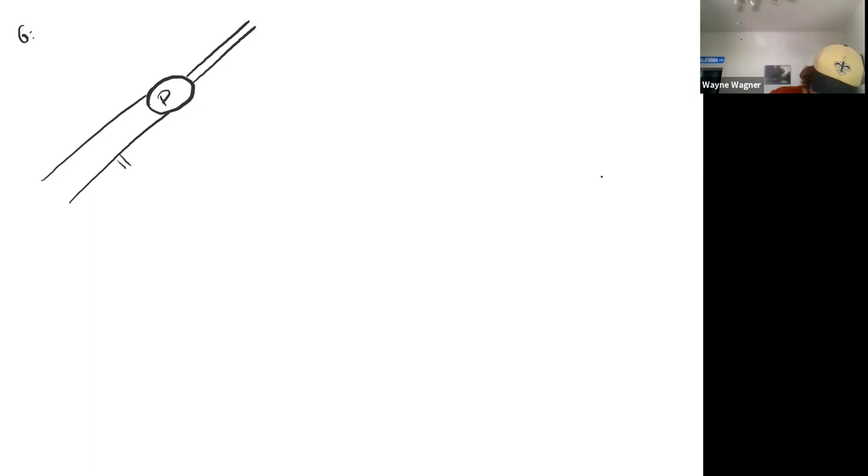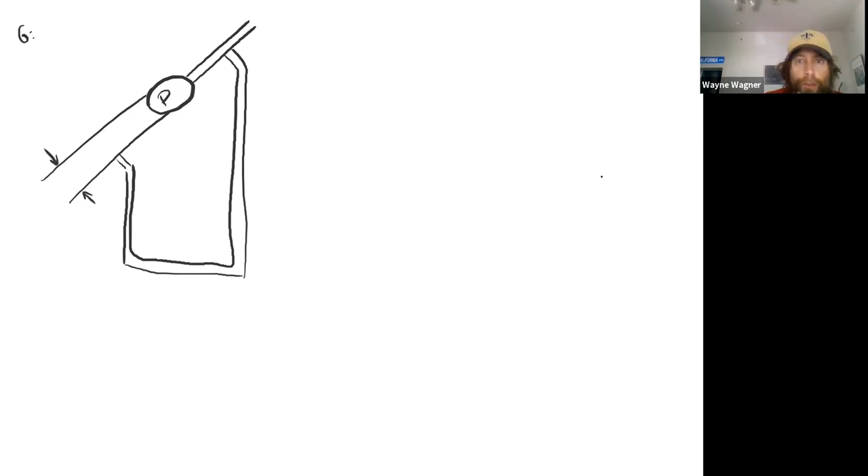Okay, so here's what we got for given. Okay, really? Okay, so I give you this thing, and it's kind of on an angle, and there's a pump. And then what comes out of the other side is narrow. I'm not drawing this exactly right because obviously there should be some holes here where the manometer comes in, but doing the best I can here. Okay, and so this is D1, which I think it gives as 2 inches, and then D2 is 1 inch.

Let's see. Oil is pumped up and through the contraction shown at a flow rate Q. There's a certain number of CFS. I don't really know what a good number is for the CFS. I think because everybody got different numbers here, people just got huge answers here. I'm going to go ahead and go with 0.1 CFS because this is a pretty small pipe.

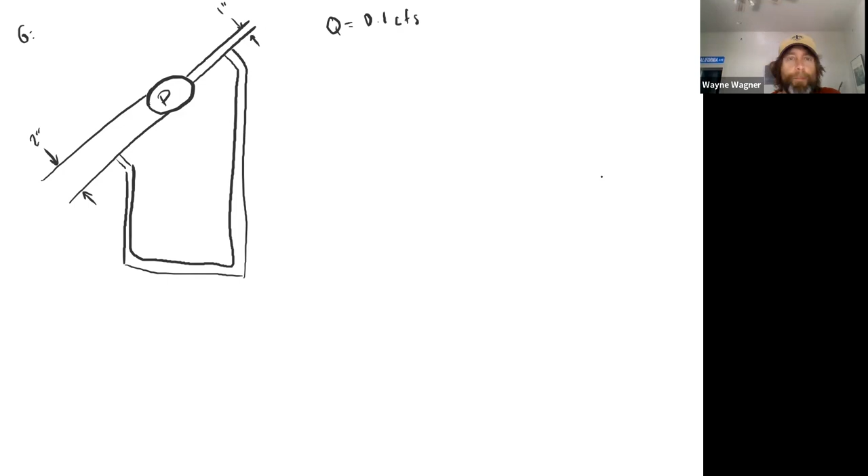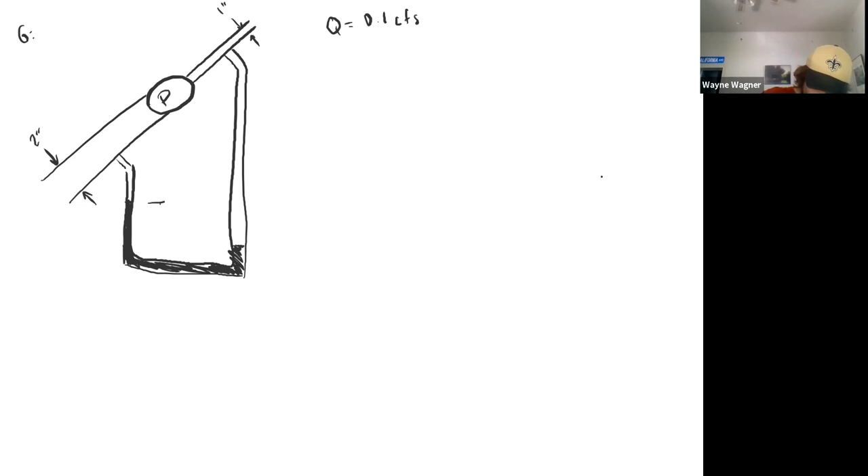Okay, so the manometer is filled with mercury. And so we've got mercury from here down to here. If you haven't figured it out, these are pretty much my favorite types of problems to ask, simply because it makes you have to know all your fluids to do these. So they give you that this is H naught equals, okay, this is mercury. So S equals 13.6 or 13.55. So this is 6 feet. That's quite a good bit of pressure considering it's mercury.

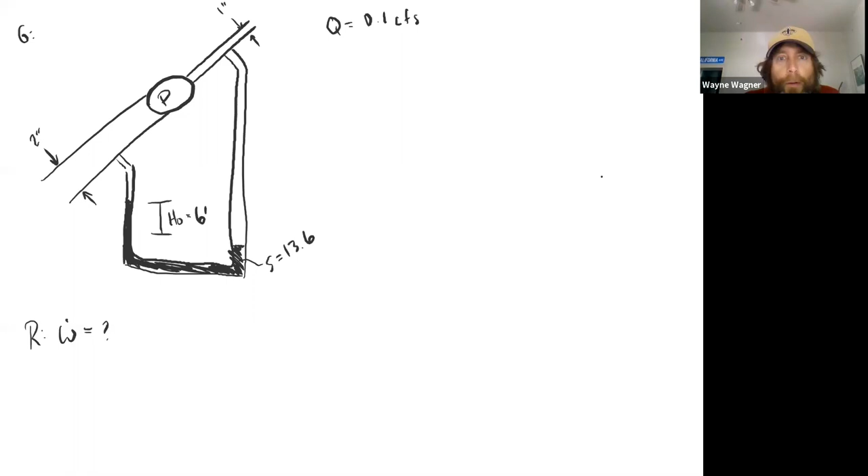How much power? Okay, so required, we want power. So the rate of work. How much power does the pump need to supply the fluid? So this is to the fluid. So this is not the amount that you need to supply to the pump. And so all of this, by the way, this is oil. So it has a specific gravity of S oil. So S oil equals 0.82.

Okay, you may assume there's no head losses. All right, so this is, as you guys know at this point, this is pretty much one of my absolute favorite problems. It did also tell you that this to this, not that this matters, it was just kind of a way to help people define variables. It kind of gave you these heights right here. So this is capital H, and this is lowercase h. Those heights are, you could call them whatever you wanted to call them. In fact, for lowercase h, I would just call it Z2 minus Z1.

But sometimes people would like to have a lowercase h because instead of having a Z, it's just a smaller term. All right, so what we're going to do here, I guess this is all part of the given. So what we're going to do is, by the way, one of the red herrings that will show up in a lot of these problems is they'll give you this angle right here. They'll be like, oh, here's this angle, it's like 30 degrees or something. But you don't care about that because all the distances you've been given or not given are vertical. So the only thing you care about is the vertical distance. The only way you would want that angle is if it only gave you a diagonal distance and you need to calculate a vertical distance.

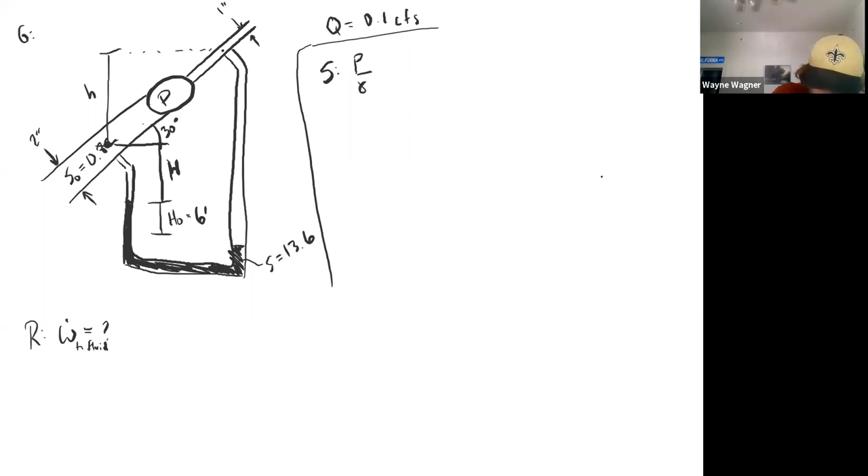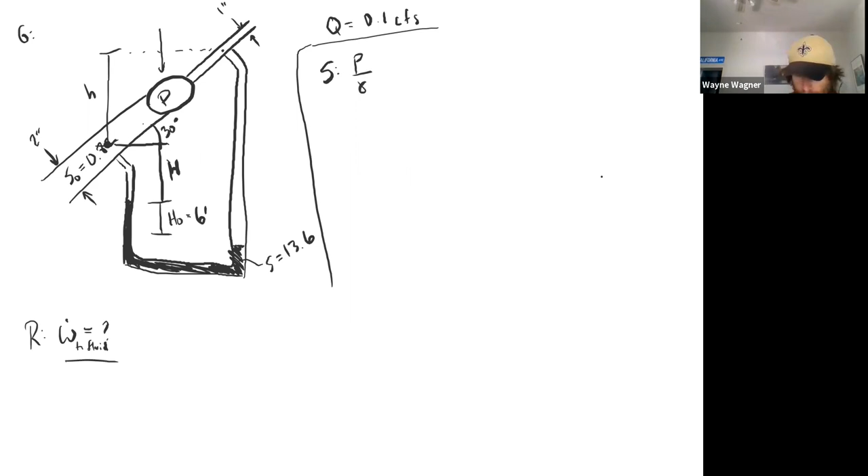Anyway, so we're going to do the energy equation, P on gamma. And this is obviously energy equation because we've got a pump here. Anytime you see a pump, and what we're looking for here is a power supplied to the fluid, we're going to be working with the energy equation. And the other way, before I write out the full energy equation, is to note that the equation we're going to end up with is the power to the pump, not the pump, to the fluid.

Okay, if we just remember where we're aiming here, the formula for that is gamma HP Q. That's the amount of power that the pump is doing on the fluid. We know gamma because they gave us the specific gravity, and we know Q. So all we need to figure out is HP.

So what we're going to do is go from point 1, which I'll put right here, so that'll be point 1, and point 2 right here. I'm choosing those points because that's where the manometer connects, so that's where we have information.

So I'll write P1 over gamma plus Z1 plus alpha V1 squared over 2G plus HP equals P2 over gamma plus Z2 plus alpha V2 squared over 2G. For space, I'm not going to write out the turbine term since everybody knows we can scratch that out. There's also a head loss term, but part of the problem statement was to ignore the head loss, so we'll ignore that too.

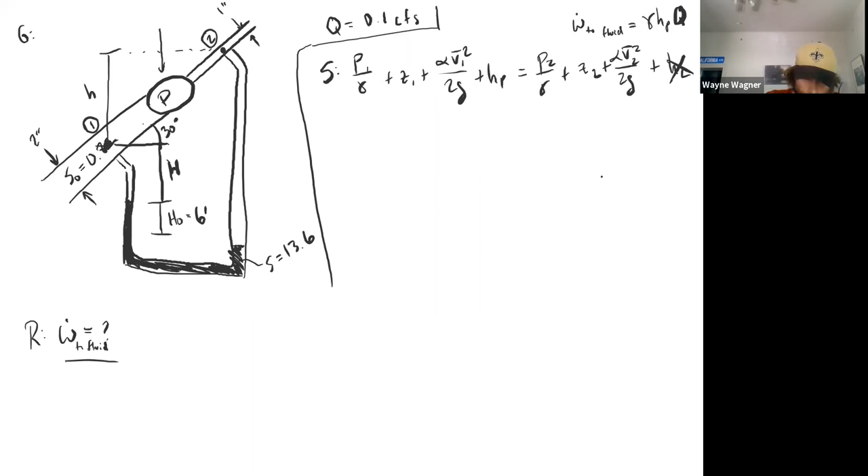Okay, so we'll start by, I use blue for this as we walk through. So P1 and P2, these two are going to have to come out of the manometer.

We'll do my asides over here, we'll just go in order. So we're going to start at 1. I'll say, okay, P at 1, then I'm going to add, we're going down H, so we'll go plus gamma oil times capital H.

Okay, and then let's see, so then I'm going to go down and over. All we care about is it going down. Sorry, that H naught should have been aligned with that, it's a bad drawing. Obviously if it aligned with something else, we wouldn't be able to solve the problem.

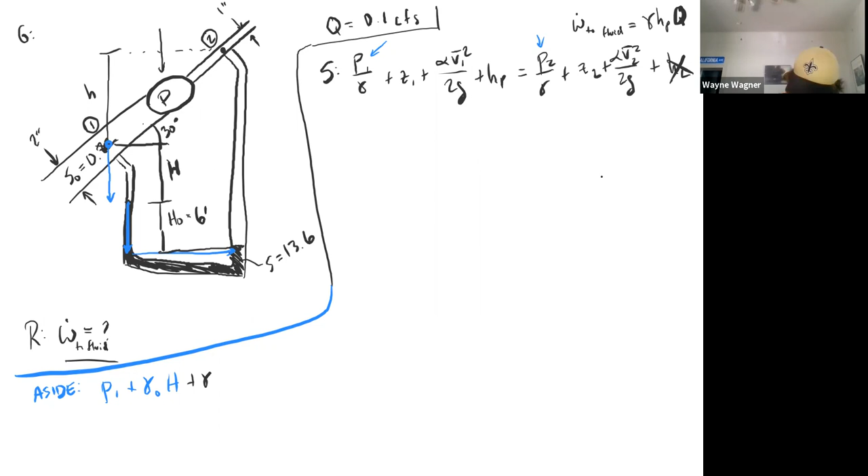Okay, so we'll bring P1 over, minus P1, that gets rid of this thing. And this is an error that I see people do: remember that in this energy equation, this gamma is the gamma of the fluid flowing from point 1 to point 2, so that's the gamma of oil. So in this equation down here, we need to make sure we divide by the gamma of oil, which is going to cancel out this gamma oil and put a gamma oil under here.

Okay, so then the last thing is I've got a positive H right here and a negative H right here, so those are going to cancel. So my equation looks like: gamma Hg, which I'm going to write as S_HG gamma water over S_oil gamma water, so those gamma waters cancel, times H naught, minus H naught minus H equals P2 minus P1 over gamma oil. And that's pretty much what it looks like.

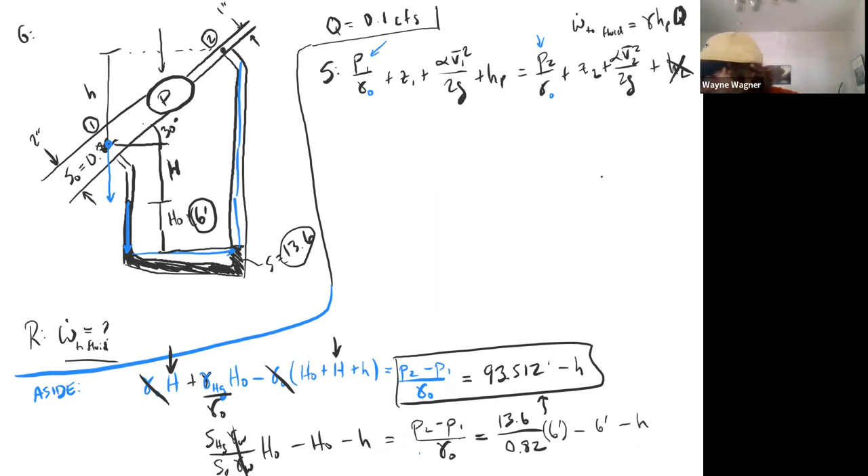I mean, we've also got 6 feet of oil on this side, but that doesn't really matter, right? Who cares? And then we've got this extra H over here, but whatever. Anyway, so that's going to take care of P2 minus P1 over gamma oil on this side of the equation.

Okay, so now we need to do Z1 and Z2. The best way to do that is to figure out where our datum is. So we'll make this our datum. Z1 is 0 and Z2 is lowercase h, which I don't even, oh, here's lowercase h. I was looking for it. So this one's going to go away, and this one's going to become lowercase h.

Now we've got V1 and V2, and the way we always deal with those is with continuity. I'm going to delete this work on the bottom so I can use continuity. As some of you have noted, you could solve for Q directly if you didn't want to do it the way I do it, that would be fine. But I don't particularly like that very much. So we have Q equals V1A1 equals V2A2, because everything that flows past 1 has to flow past 2. So we know Q, so we can solve for V1 and V2 pretty straightforward.

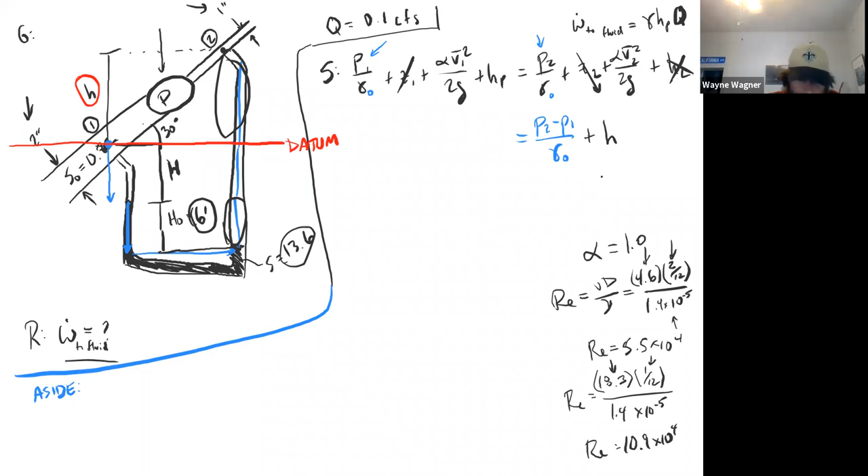32.2 feet per second squared, plus HP. So I guess we've got that. This is what we're looking for right here: P2 minus P1 over gamma, plus H, equals 93.512, minus H. These two H's always cancel each other out, which is a really nice thing, but it's something to watch out for.

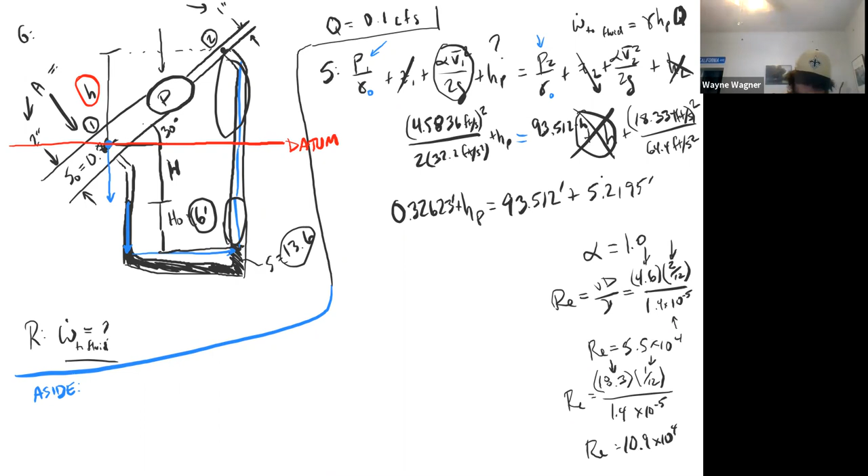But anyway, one of the points I wanted to make here is: area equals... so I'm going to compare D1 and D2, location 1 versus location 2. Location 1 has 2 times the diameter of location 2, right? So that means location 2 has 4 times the velocity, or I guess area.

That means this one's got 4 times the area, right? Which means for velocity, location 2 now has 4 times the velocity. Now when it comes to head, we have to square these velocities right here and right here. So when we square them, location 2 ends up with 16 times the velocity head over 2g.

So small differences in the pipe areas, I guess it's a factor of 2, leads to massive differences in the head. So if I were to take that 0.32 and multiply times 16, I'm going to get this number right here. It's important to recognize that when you speed that water up, from an energy standpoint this one is almost like you could almost ignore it if you wanted to. It's not really important. Now for this class, don't ignore it, but it's just something to be aware of and get some intuition.

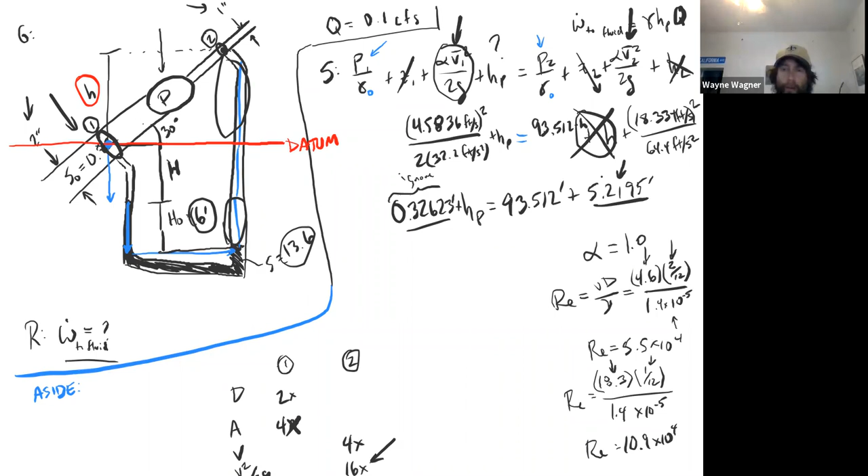So Bull, did I make an error or did you make an error? Well, you used a different Q so I got a different number for the velocity. Like for V1 I got 45 and V2 got 183. Okay, because you used 1 CFS for your Q. Yeah, and then HP is 582.907. Right, okay, that makes sense. So that's why, you just used a different number for Q. All right, so if we use my numbers though, I would say it's fine.

So I'll do 93.512 plus 5.2195 minus 0.32623, and we get HP equals 98.405 feet. Okay, so now we can go back up here to this and we can just solve this problem, right? So we can say the pump gives it 98.4 feet of head.

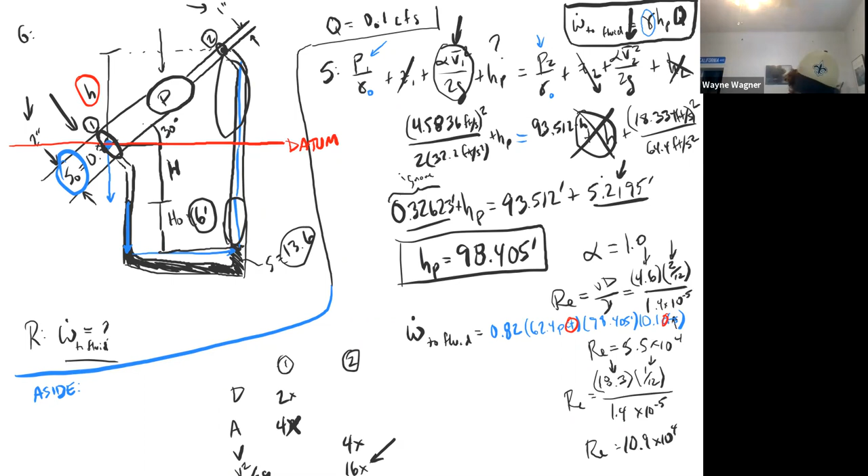So I need to do 0.82 times the gamma of water, 62.4 PCF, times that HP, 98.405 feet, times Q, which is 0.1 CFS. Okay, and then of course I always recommend checking your units. So pounds per cubic foot - we've got cubic feet here, we've got cubic feet here, so those cancel, and we're left with pounds-feet per second, which is a good unit for power. So we just multiply that.

Times, and the error too. I say I made the same error like the one you just mentioned - you got to multiply by 0.82. Yeah, yeah, I make that error. To me it's the most common - it's probably the most common error I will make.

So 503.52, and that's foot-pounds per second. And if you get a really big number and you don't like it, you can divide by 550 and put it in horsepower. I don't like horsepower because, well, I like it because it's a nice small number, but you can't use it in your equations - you always have to convert back to foot-pounds per second. But the other reason I don't like it is its symbol is HP, which in a problem where you're working with head for a pump, that can be confusing.

So I would just generally try to avoid that. Now you might, in the next class, if y'all are in hydraulics, they might ask you to solve a problem and just get it into horsepower. If they want you to do that, just divide by 550. But don't have anything to do with horsepower other than that, or if they give you a problem in horsepower, just multiply by 550 foot-pounds per second.

Unfortunately, in America, we do this the dumb way, so we just got to deal with those dumb units sometimes.

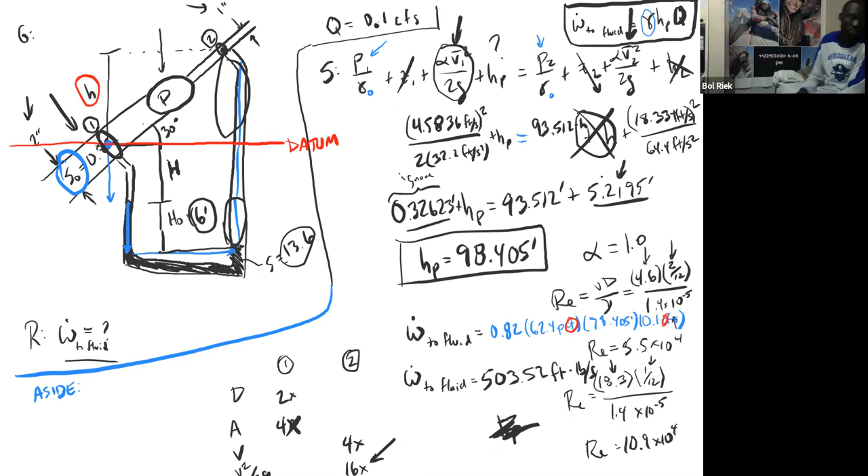So hey Bol, in Sudan, what units do you guys use? We use kg and stuff. Yeah, y'all do it intelligent - y'all do height too, and short distances, using meters instead of feet or inches. Yeah, because it's really confusing if you go to England - it is the English system of units, and they use kilograms and things like that, but sometimes they use inches and feet too, it just depends on what it is. Like I found a scale and I wanted to weigh myself, and it told me how many stone I weighed, and I was like, what? I have no idea what it means.

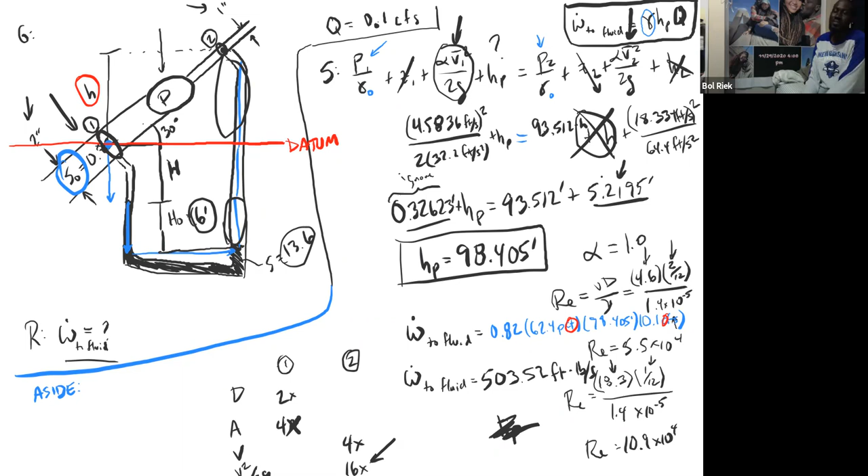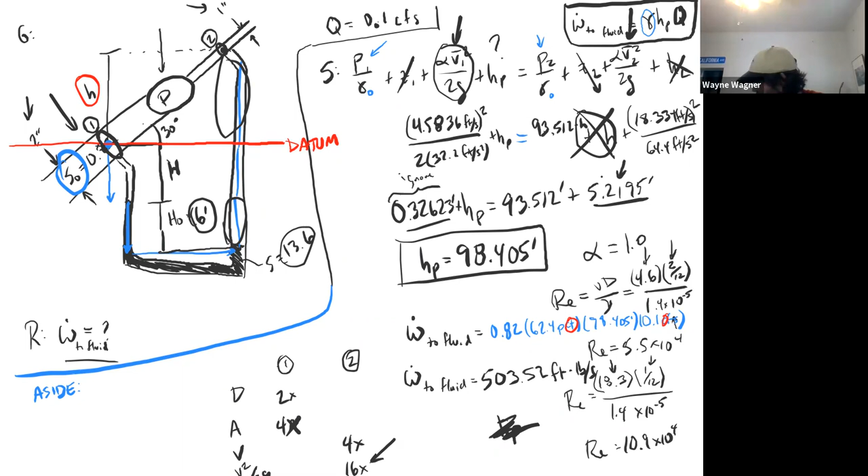And I think it was... Don't they sell gas in liters also? They do sell gas in liters. Yeah, that's fine. I know what a liter is for the most part, but a stone I had to look up. I think it's either 14 or 18 pounds per stone. So anyway, what's up, my boy? That's the same in Sudan too. When they sell gas, they do it with a liter, because Sudan was colonized by England, so we follow almost what they did. As long as you end up with kgs, that's all I can say, man.

I wish we'd done it. They started to try, I think in the 70s they started to do something where they were going to slowly shift everybody over, but then they didn't do it.

My dog is going crazy. What is it? Your dog needs to do some homework. Okay, let me come here. Come climb up on me.

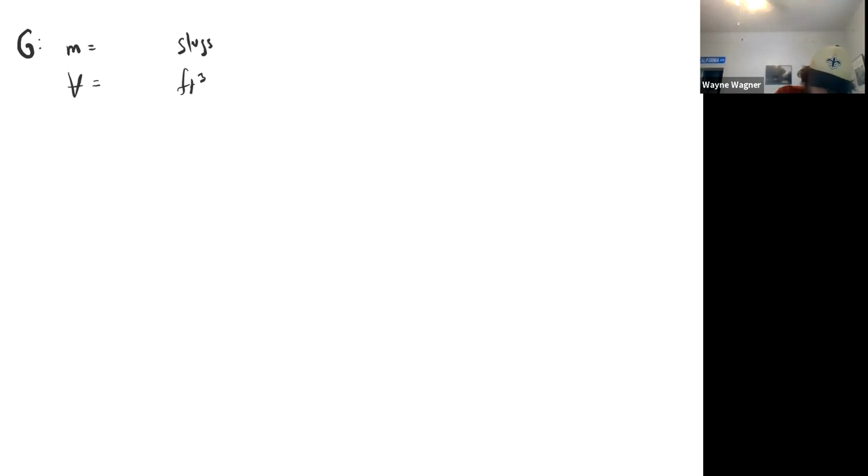All right, anyway, okay, so I'm going to do the third problem from this exam. I have an object with a mass - this is what's given: mass equals something, and volume equals something. The mass is given in slugs. If I drop this object into seawater, which has an S of 1.03, will it float or sink? So the required is float or sink.

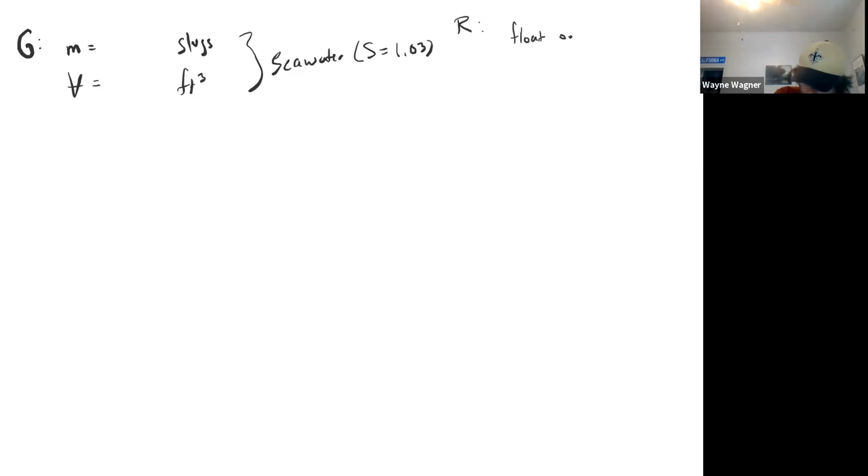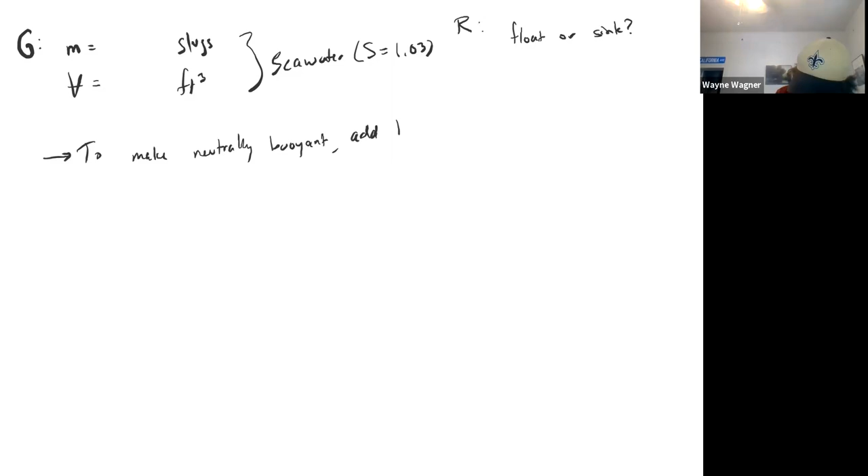That's the first question. And then the second question is, I would like to make this object neutrally buoyant. To make it neutrally buoyant, what we're going to do is either add a balloon or a weight. If I attach a balloon, how much volume does it need to be? If I add a weight, what does the weight need to be in order to make this thing neutrally buoyant? When I gave them this problem, I said if it ends up being a balloon you need to add, I want you to ignore the weight of the balloon. And if you add a weight, I want you to ignore the volume of the weight.

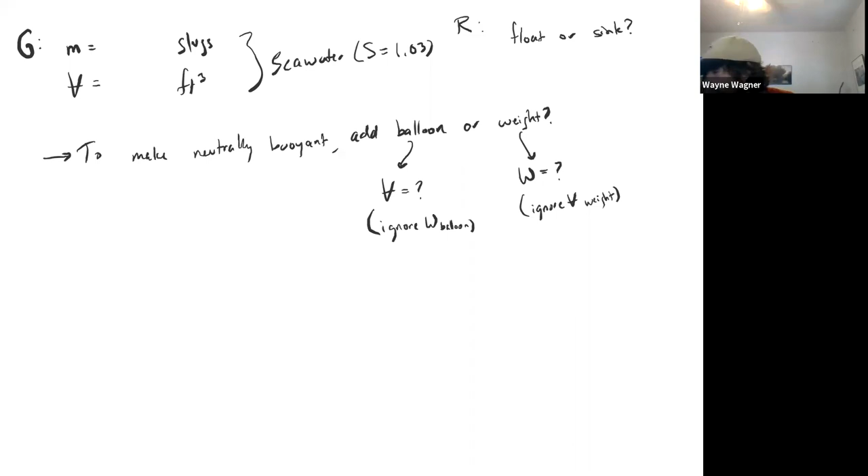So this is an interesting problem because depending on what your student ID number was, it would either float or sink. I'm assuming roughly half the class went up and half the class went down. Well, let's pick something that will almost certainly sink. It's hard for me to actually think about these numbers, so let's give something that's 3 slugs. Let's make it 3 slugs, and we'll work this problem twice, so that we can see both ways, both things that can happen. Make this 0.5 cubic feet. You're kind of like, well, I don't know what that's going to do.

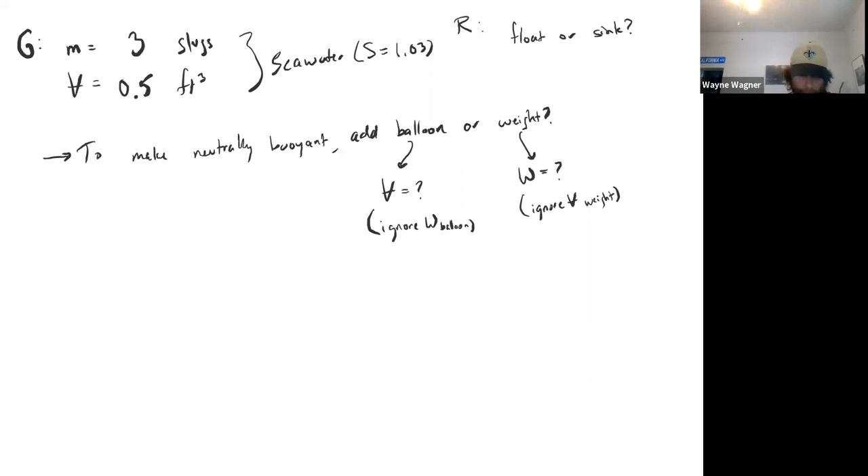Okay, so what we want to do here is compare the density of the object to the density of the seawater, or it could be the specific gravity, the specific weight, or whatever it was. We know the specific gravity of seawater here. So we could go ahead and just try to get the density of this thing. S of our object equals the density of our object divided by the density of water. That's really the way we're going to approach this, and we're going to compare this number to that number. If the S of the object is greater than the S of the seawater, then it's going to sink. Okay, so let's go ahead and do this.

The density of the object is the mass, 3 slugs, divided by the volume, 0.5 cubic feet. Divided by the gamma of water - now the gamma of water, this is annoying, right? Because whenever you have to deal with, not gamma, the rho of the water, the density of water is in slugs per cubic feet. So that's 1.94 slugs per cubic feet. Hopefully you can see how I knew that this thing was going to sink. So 3 divided by 0.5, that's 6. So 6 divided by 1.94 is about 3 point something - 1.94... 62.4 divided by 32.2 is 1.94. 6 divided by 1.94 is 3.0928. So this is almost 3 times as dense as the seawater, so it will sink.

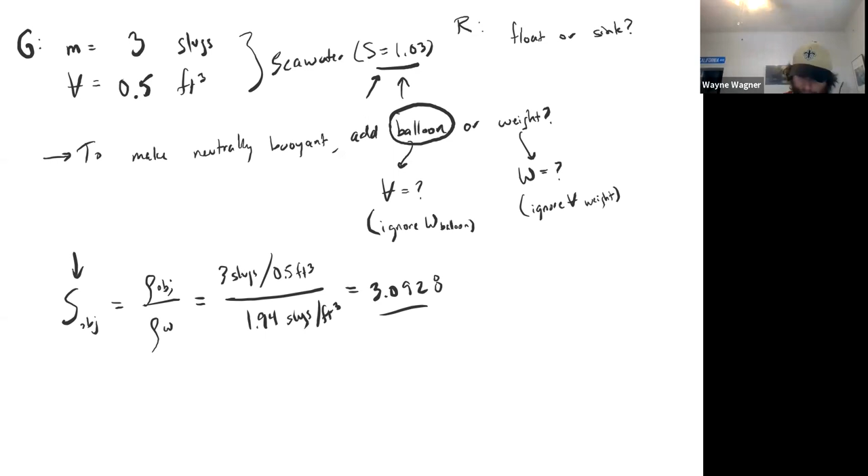So if it's going to sink, then we're going to have to add a balloon to it to make it rise, or to make it not sink. So then the key is, how big does this balloon have to be? Well, let's see. So here's our object, it's underwater. So here's our free body diagram.

Hey, what's going on? Hold on, give me one second. Let me see, what is it that you want out there? You want to eat some grass? We'll go open the back door for you. Come on.

Sorry about that. Some days are just too pretty to be stuck inside while your master works. Okay, anyway,

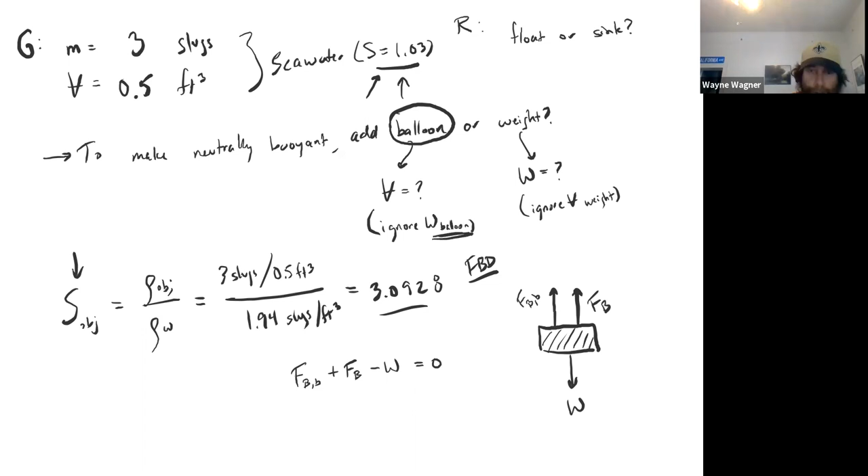So for this thing to be neutrally buoyant, that means all those things are going to add up to 0. So we're going to do FB plus FB minus the weight equals 0. Technically, there's also a weight of the balloon. If we drew this all as one object, so if this is the weight plus the balloon, if this is the 2 objects here, then the weight of the balloon would also be on here. But I asked you to ignore the weight of the balloon, because I didn't want you to have to think about that too much. So so the buoyancy of the balloon.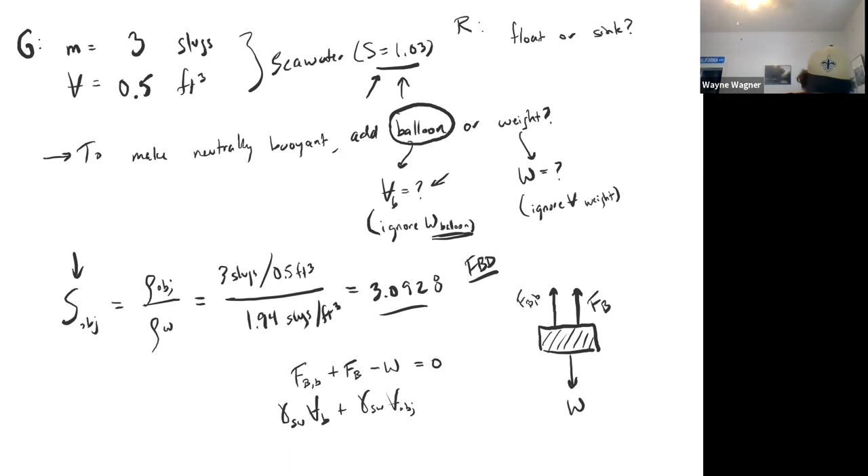So buoyancy is always gamma of the fluid, so that's seawater in this case. Seawater times the volume of the balloon, which is what we're solving for right here, plus the buoyancy of the weight, which is going to be the gamma of seawater, times the volume of the object, which was given, minus the weight of the object, which of course is mass times gravity in this case, equals 0.

And so that's ultimately how we're going to solve this, because we know the gamma of seawater is 3.0928 times the gamma of water, which is 62.4 PCF, times the volume of the balloon plus, well, let's do it this way, volume of the balloon plus the volume of the object, which is 0.5 feet cubed. Minus the mass, which is 3 slugs, times gravity, which is 32.2 feet per second squared equals 0.

By the way, if you solve this and you end up getting a negative volume, that means you made a mistake here probably. Well, you could have made an algebra mistake, but if you end up getting a negative volume, that means basically you got the wrong sign, which means you should have added a weight.

Alright, so let's see, 3 times 32.2. Okay, bring that over to the other side, make it positive, divide by 3.0928, divide by 62.4. Subtract 0.5. And I got a really small balloon. I might have made an algebra error here. My balloon is like 5.42 times 10 to the negative 4 cubic feet.

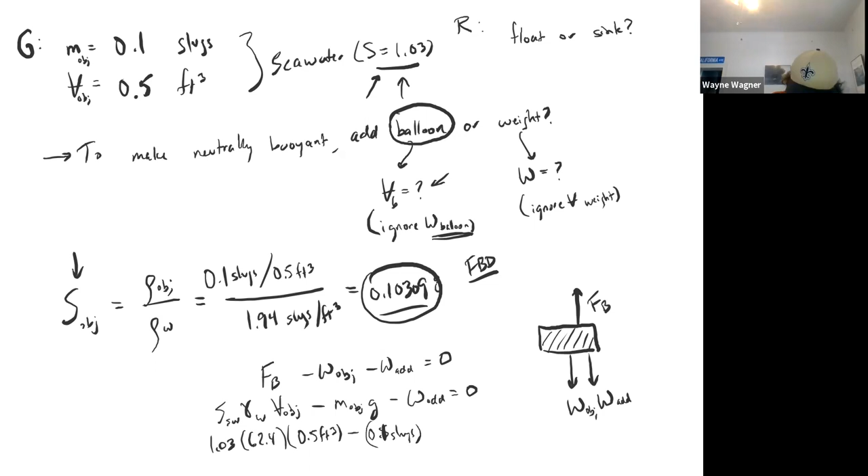Specific gravity of seawater is 1.03, times the gamma of water, which is 62.4, times the volume of the object. What's the volume of the object? A half a cubic foot. Minus the mass of the object, 0.1 slugs, times 32.2 feet per second squared, minus the weight added equals zero.

So we just go ahead and solve that: 1.03 times 62.4 times 0.5 minus 0.1 times 32.2. So we're going to get 28.9 pounds.

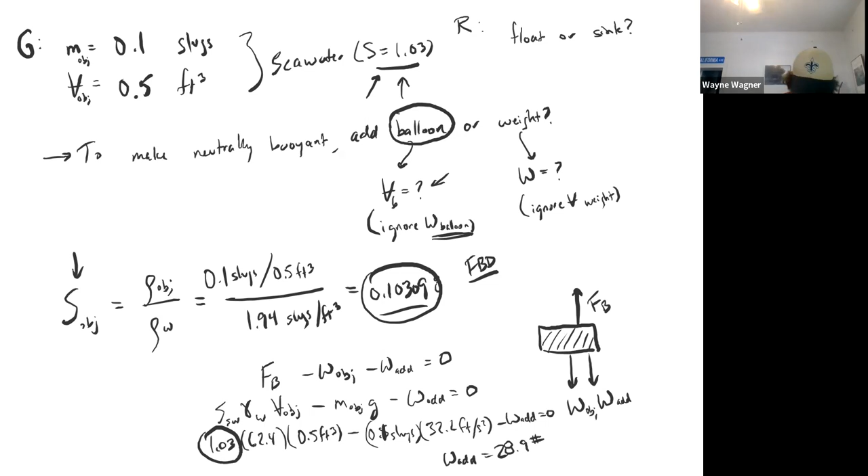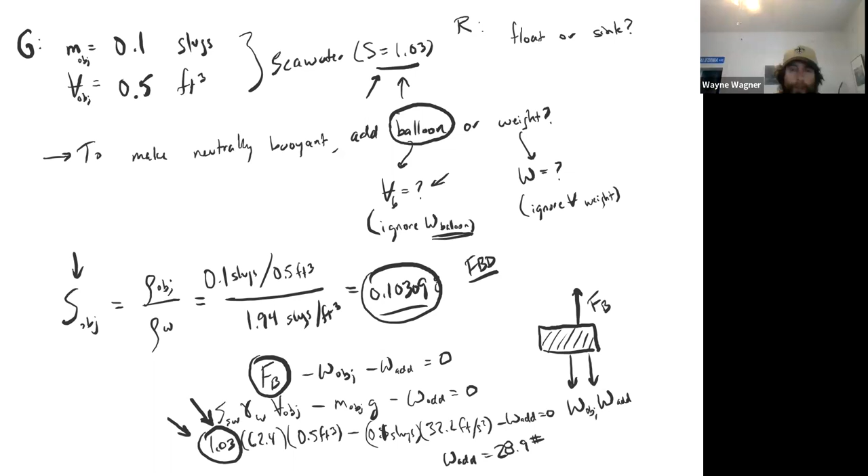Now I'm wondering, did I use this number last time right there? I didn't use 3. Oh, it would have been. Use 3, yeah, right, but it should have been 3. For the seawater, make sure I used 1.03. I think I might have written it down wrong. The buoyancy force is always about the fluid, so it should be related to this 1.03. Just check your notes and make sure that I used the right number last time through.

Okay, so what did we get? We got 30 minutes. Any questions on this?

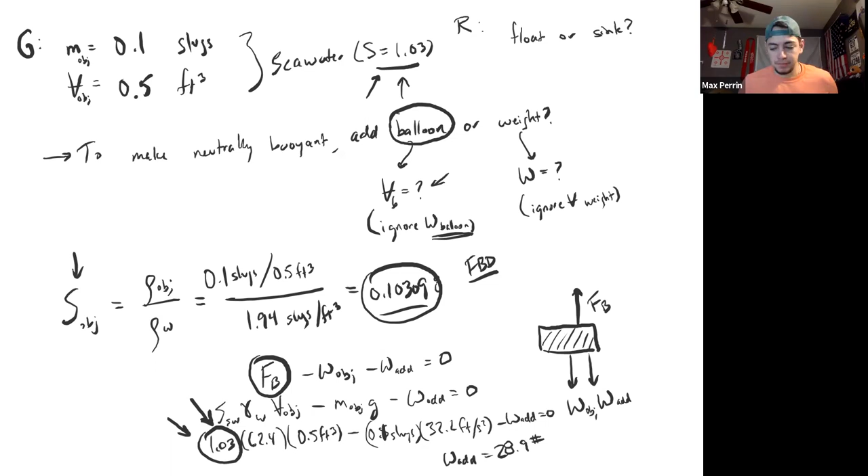The buoyancy problems are always just: draw a free body diagram and figure out what you're looking for. Usually what I like to do is have something where only part of it is submerged, so that you know it's only the volume that's underwater - this is the volume displaced. It does not include the volume above water. Just something to be aware of.

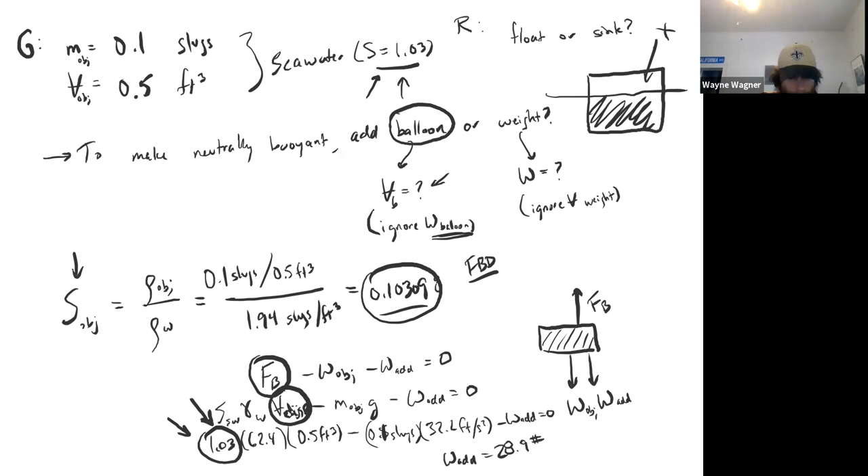Anyway, let's see, on to the next one. Let's do this.

Draw the EGL and HGL for the system below. This one was designed to be easy, but I also knew that because of the way I drew it, it was going to trip some people up. But if you knew your stuff, this was a really easy problem.

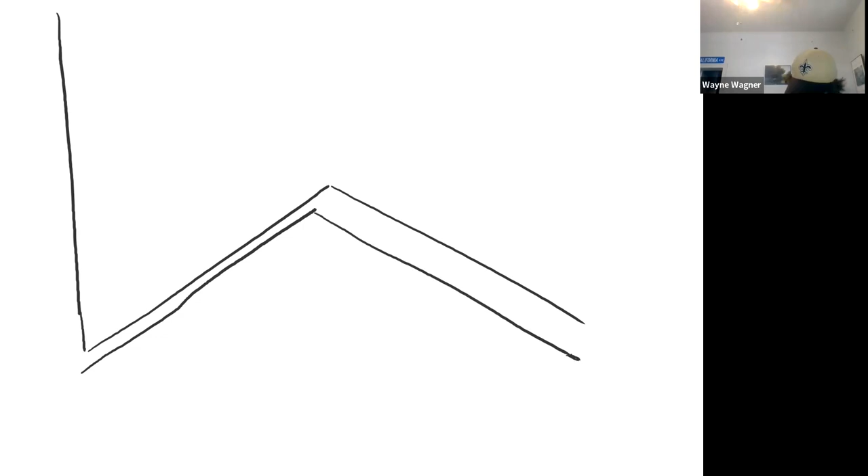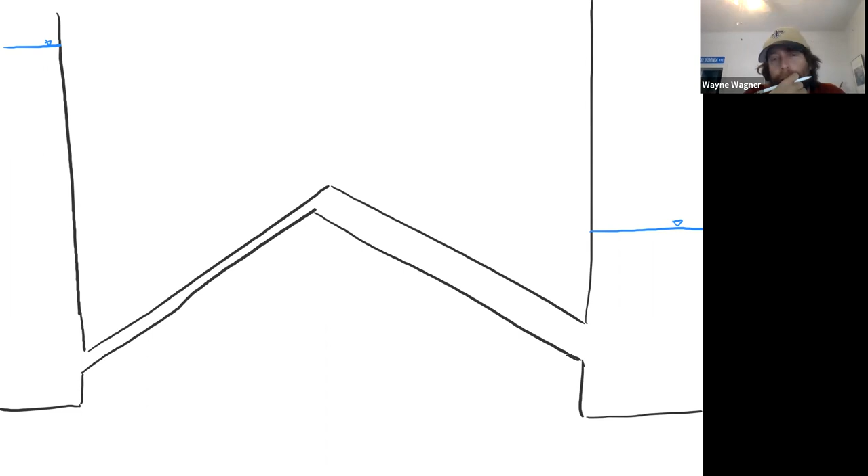Imagine those lines are vertical - the vertical lines are actually vertical. So we've got water here, and somewhere over here. This one was given, and what you're supposed to do is draw the HGL and the EGL, and then indicate with a star the location where cavitation is most likely. Cavitation is not very likely on this system, but it could happen depending on how you draw it.

So what we're going to do here: the key here is this. We're going to lose energy here, here, and here - those are our minor losses. Other than that, we're just going to lose energy on the walls of the pipe, and we'll lose energy faster here than here because the pipe is narrower.

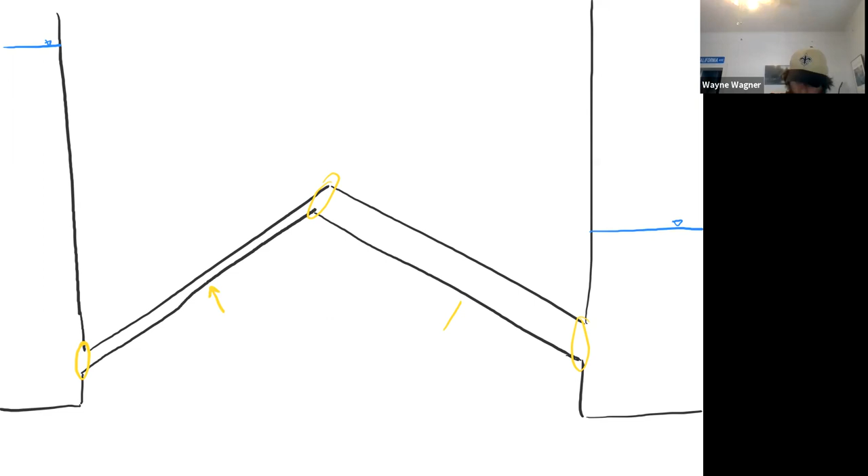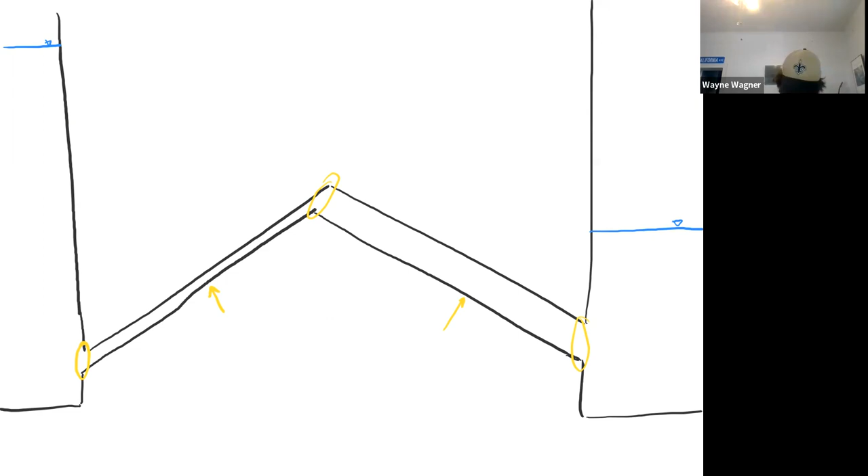So basically, keeping that in mind - I told you to do it in dotted and solid, but I think here there's no need for that because I have colors. So here's black - I guess black's a terrible color for this. Do we have a green? We've got a green, okay, so here's green. This is the EGL.

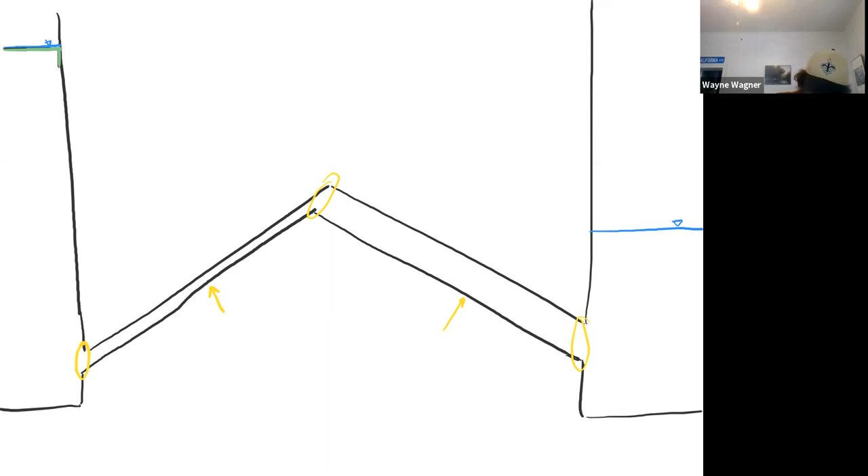We're going to lose a little bit right there. We're going to go down fairly steep here. Then I'm going to hit this point and lose some energy. Now I'm going to go down less steep because we've got a wider pipe. And then there'll be some energy loss here. And that's it - that's the EGL.

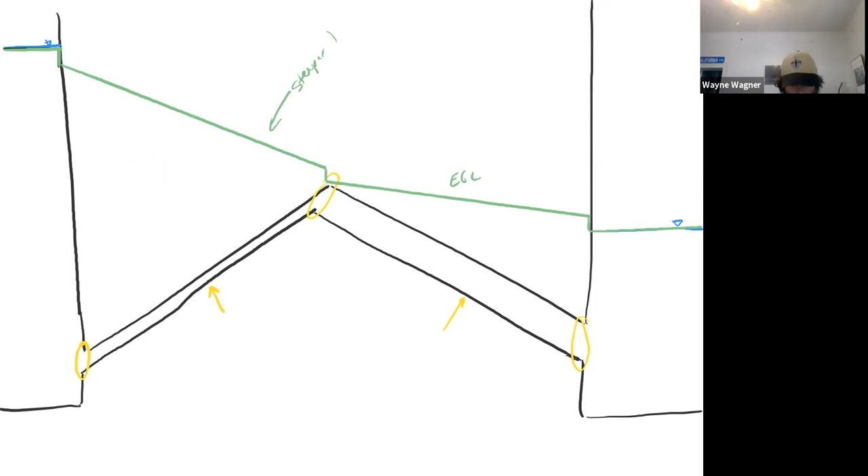If I'm grading it, what I'm looking for is that this is steeper than this, and I'm going to check to see that you've got these losses.

And that you end up on the water surface. So that's how I would grade the EGL. For the HGL, then we would basically do V squared on 2G in our head.

So V squared on 2G, where is that the biggest? It's the biggest in this pipe, and smallest in this pipe. I've already kind of decided how big it's going to be because this loss right here is V squared on 2G. So that means, since this pipe has a constant diameter, that V squared on 2G is not going to change through that whole length. Right, something like that.

Now it goes into this narrower pipe, so the V squared on 2G needs to be bigger. Have fun with it, there's no reason to be afraid, you can go pretty big. And there you go. That's it—there's only two V squareds on 2G in this whole thing: this narrow pipe, and this wide pipe.

Now this little discontinuity kind of troubles people sometimes, but what's happening basically is right there we're having energy convert from velocity to pressure. It's becoming pressurized because the pipe widens. The pipe widens, the fluid slows down, and the pressure rises. So that little jump right there is the jump in pressure.

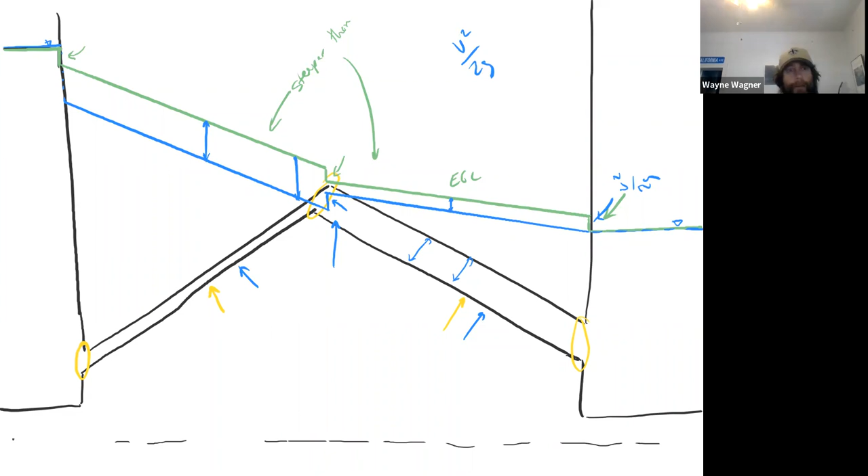So if you wanted to know where is this thing most likely to cavitate, well let's see—in black, here's a random datum down here, here's our Z. Usually if the flow is going upwards, pressure's dropping, so be aware of that. That will help you figure out where it's most likely to cavitate, or where we're basically looking for where the pressure is the lowest.

We know V squared on 2G, I've already put that in a couple places—this is V squared on 2G. So what's between those two is the P on gamma. Maybe we'll do that in green, that's right here and here. And you can see it's getting smaller and smaller and smaller, and it even goes negative a little bit maybe, and then it goes back to being positive.

So the most likely place for you to cavitate is, let's see, if I do Z going right up maybe to here, then it might even be negative right in there just a little bit. It might go from there back down to that blue line. So basically I would be looking for a star somewhere right in here to say that's where cavitation is most likely. And it conceivably could happen.

So if I had drawn this pipe and had it go way up here like that, then you can see that the pressures can get quite negative if you try to go too high. So just something to be aware of.

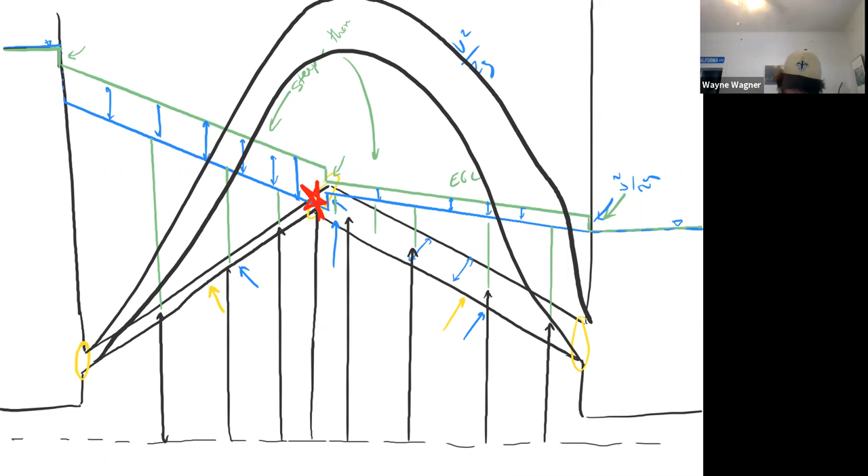Another possibility, and I hadn't really mentioned this—let me undo that. All right, so let's suppose we're looking at this spot right here, and you're like, well it's not going to cavitate, but it will have low pressure. So one thing to consider is let's suppose your pipe has low pressure, let's suppose it goes negative.

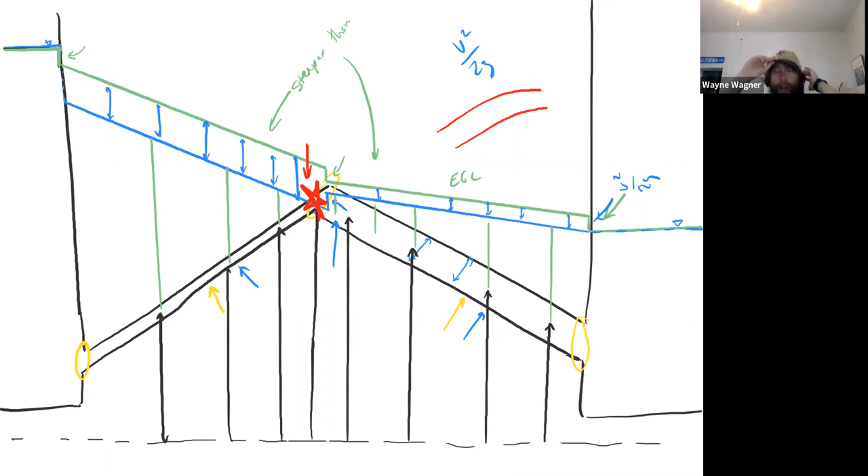What that means is, because people tend to freak out about that, and because we forget about gauge pressure, it just means it's lower than atmospheric pressure. But if it's lower than atmospheric pressure, that means the pressure on the outside is greater than the pressure on the inside of the pipe. So if your pipe is made out of like some soft rubber or something, then you have a possibility that your pipe might just implode. So it's just something to be aware of—if that's going to happen, you want your pipe to be strong enough to maintain the outside pressure, or the difference between the two, really.

I guess normally the pressure is higher on the inside than it is on the outside, so you usually assume the pipe can hold that, or you size the pipe for that. But just be aware that the other possibility can happen if the pressure on the inside of the pipe drops too low. Okay, so any questions on this?

I guess the only thing I could have done to make this test you a little better would've been to put a pump or a turbine in there. Other than that, I can make it complicated, have a whole bunch of different changes in the pipe diameters and things like that. But this really answers all the questions I have for you theoretically, or qualitatively. If I wanted to make it quantitative, which I probably won't do, we could make it a lot more complicated.

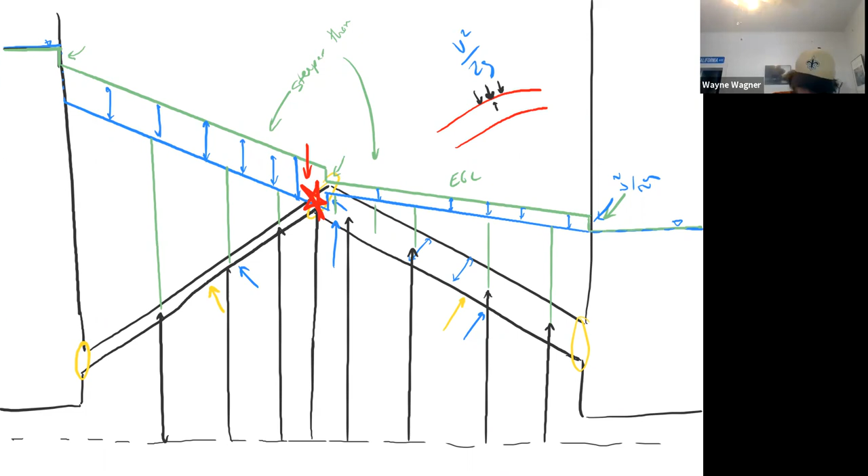On the final, we'll just have to draw something. We won't have to solve for anything. If you look at the old finals, I've done some where I draw it for you and ask what's going on. So if I erased the diagram of the water and the pipes, I could say what's happening here. Now you wouldn't be able to tell, for example, that this pipe is going up, that the pipe was climbing right there. There's no way to tell that from this drawing.

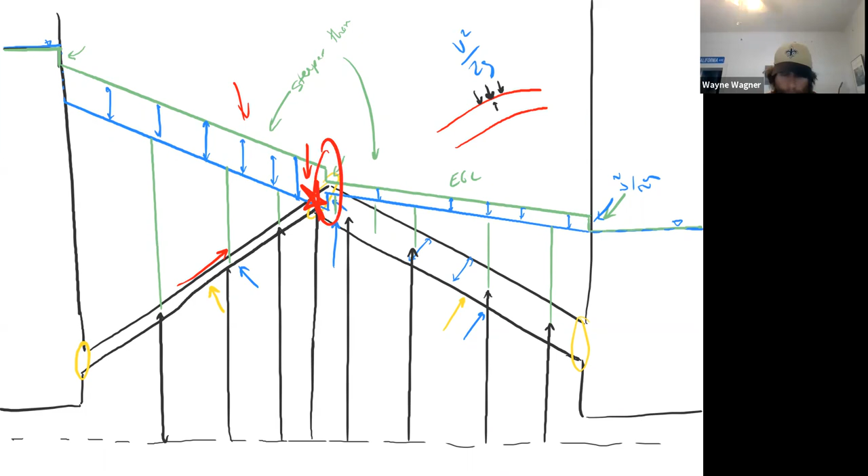But you could say, what's happening here? And you can say, oh, the pipe's expanding, and something about how the two pipes are connected is a change, so there's a little bit of a loss here. It could just be that it's doing this, and then it did that, and that would draw exactly the same way as I just drew it.

Or you could say, what's going on right here? Well, the fact that these two are at the same height means that this is a reservoir. And the fact that this just dropped like that means it's kind of an abrupt loss of energy, an abrupt expansion. Because otherwise, usually if the expansion is not abrupt, you'll see something like that. There are lots of different ways it can happen. I think one of the ones we did in class looks like this, which is pretty weird.

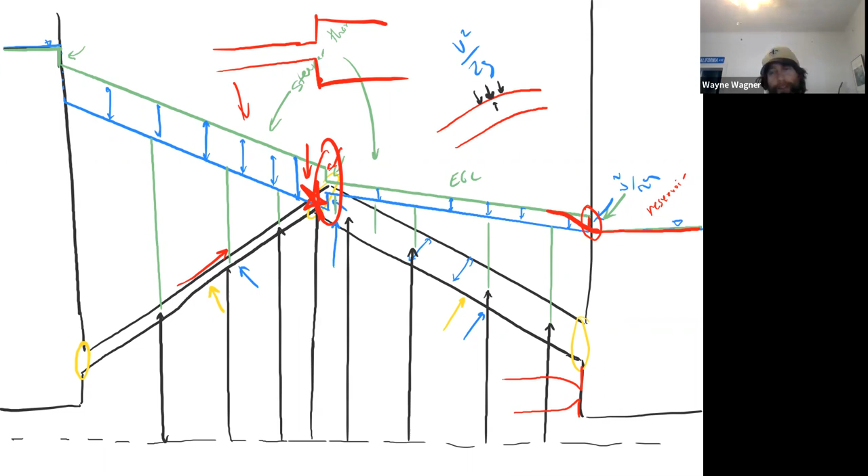But anyway, does that answer your question, Max? Yeah, thank you. Okay, cool. Okay, hold on, I gotta...

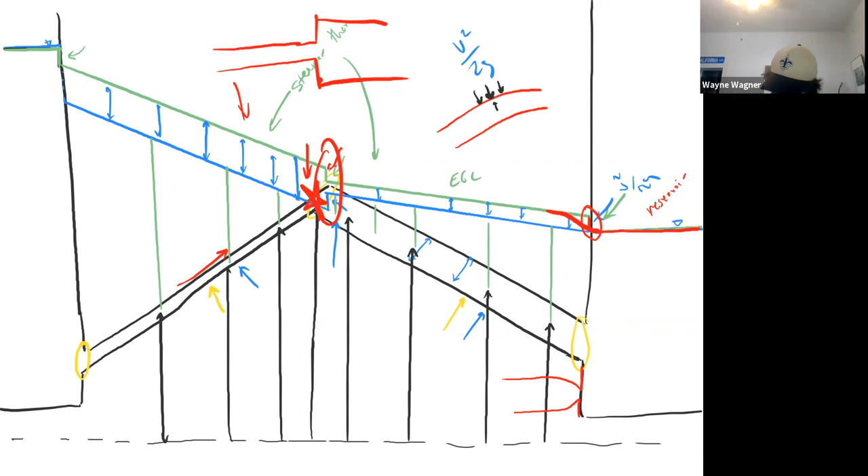Oatmeal's really not good. I mean, it's totally okay to just have around the house for an emergency, but boy, it's not really my favorite. Unless you put a whole lot of fruit in it or something. But then it's really just because I like the fruit.

All right, let's see. I've got 3 left on this thing. We've got like 20 minutes. So y'all pick: I can either do 'determine the force P necessary to just start opening the 2-meter wide gate,' or this one which looks like a momentum problem, or I could do 'find the discharge of water through the pipe' with loss coefficients.

I would say the second one because... Momentum? ...the harder of the two. Okay, then you think like I do, which is that the momentum is the hardest, but I don't always get that response from people. Okay, this will be number 6.

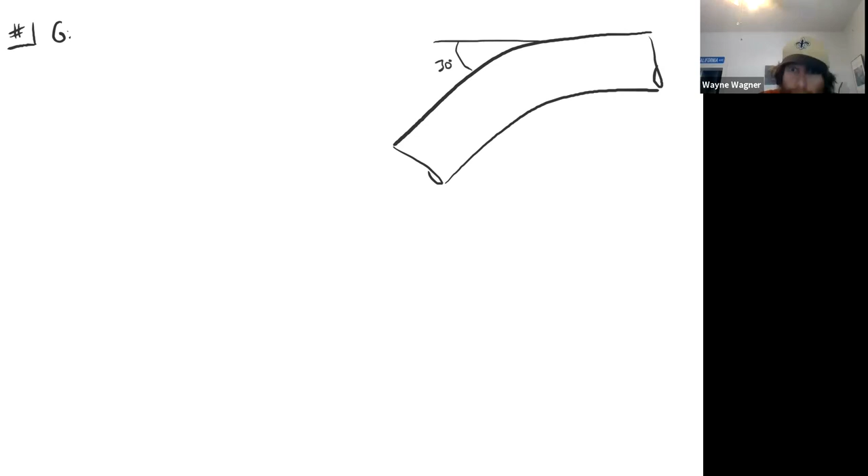Okay, let's see here, number 6 off of that test. I guess it doesn't matter, you don't have the test. So anyway, given, I'll draw the picture—picture is easy. And this makes an angle of 30 degrees, and it's got the Q going this way, and it's got X, Z. Okay, 1 meter diameter pipe.

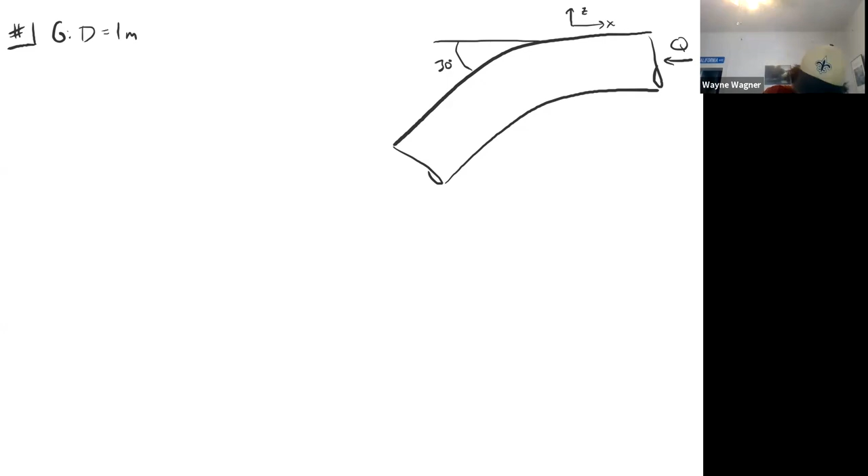Carrying liquid magma—I like that, liquid magma. S equals 2.65. With a steady flow rate of Q equals, looks like this was something based on your student ID number, so 5 CFS—oh, CMS, excuse me, cubic meters per second. The bend turns downward at an angle of 30 degrees. The volume of the magma in the bend is some number of cubic meters.

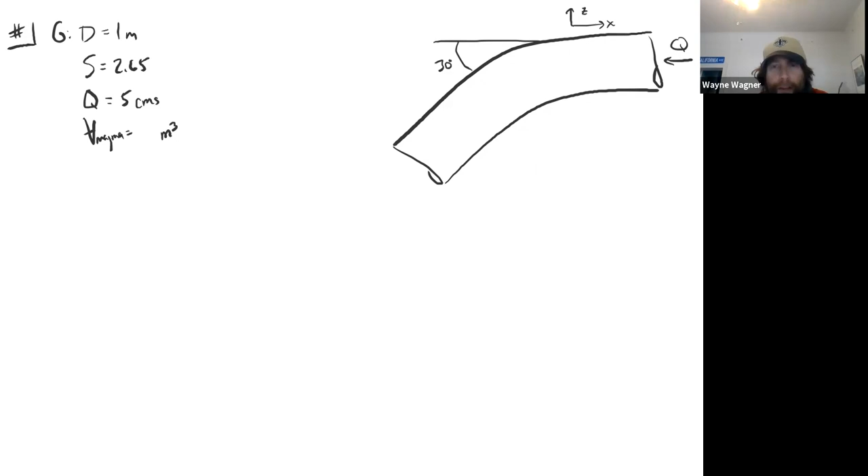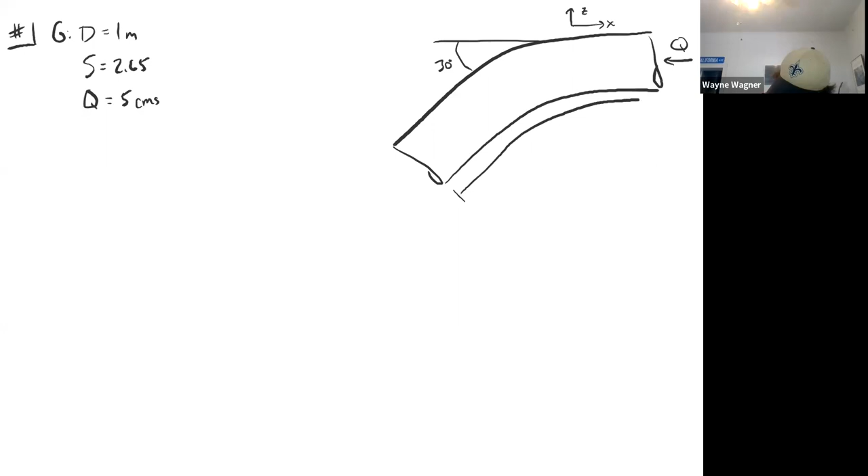Can't believe I gave that to the class. Normally I would make them calculate that. You know what, let's make you calculate that. Let's assume we don't know that. Let's assume what I'll give you is the length of this thing. Come on, you can do it. The length of this is, I don't know, 5 meters.

Okay, and the empty weight of the bend, so the weight of the bend is 2.4 kilonewtons. Assume the pressure in the pipe, pressure everywhere, is 75 kPa. What is the vertical force required to hold—so the vertical force to anchor. So F anchor in the Z direction equals what?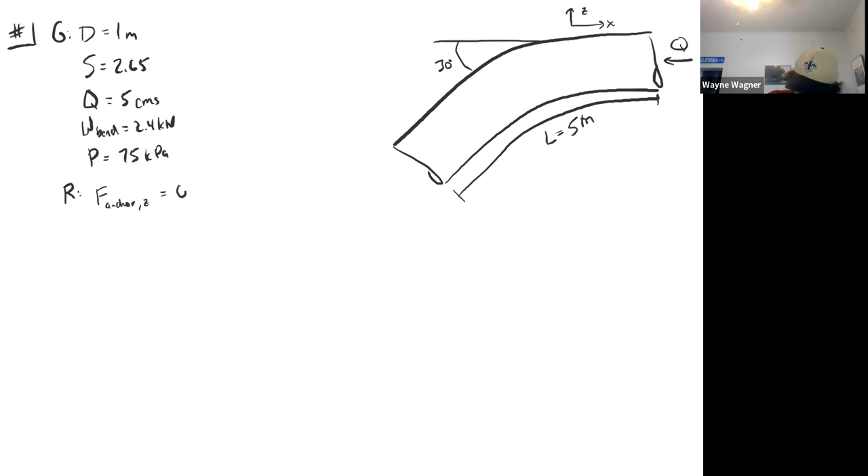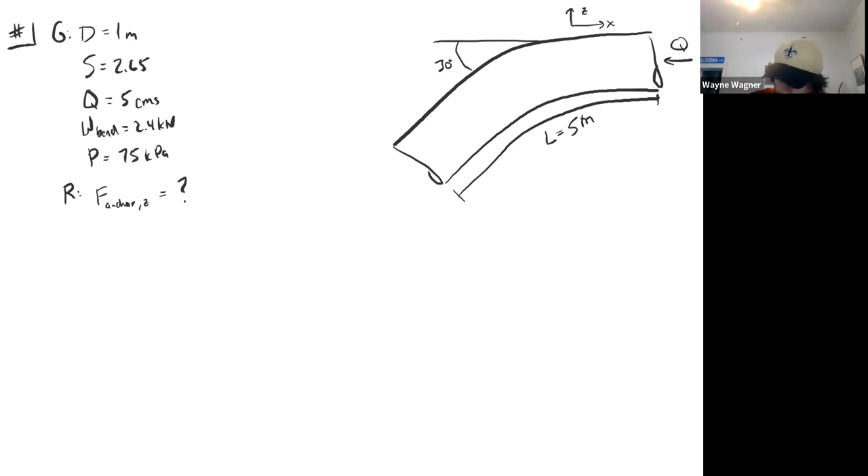Okay, so this is a momentum problem. And of course, the reason I assigned it the way that I did is I wanted you to do the Z direction. I'll almost never ask you to do the Z and the 2 directions. I did that once and it ended up taking the class entirely too long, and there was nothing to be proven once you knew 1 direction.

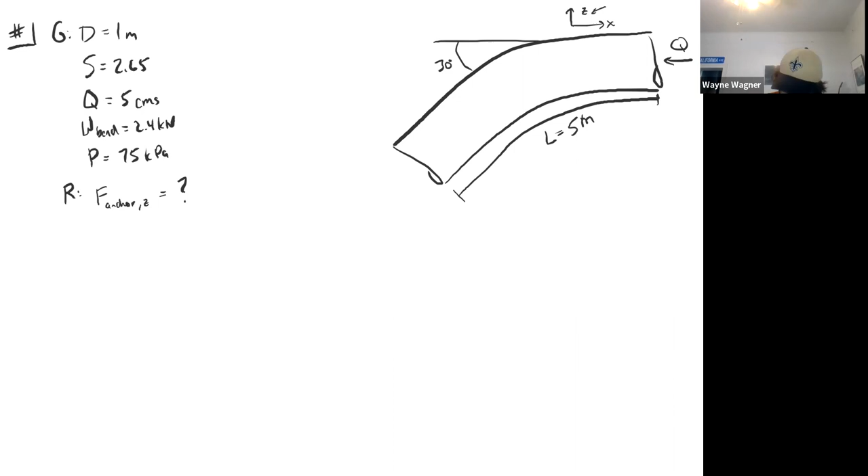So I guess, just that you can add forces in 2D, which I assume everybody should be able to do already anyway. So what we're going to do here is a free body diagram of the pipe and the water. So here it is.

Okay, so in blue, here's my momentum fluxes, 1 and 2. Now I need forces, I'll do them in green, P1A1, or P2A2 right here, and P1A1 right here. Okay, and then we've got weights.

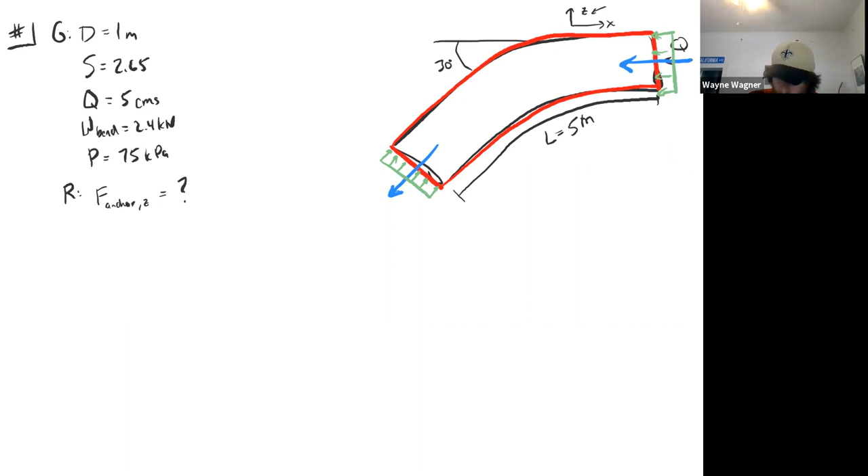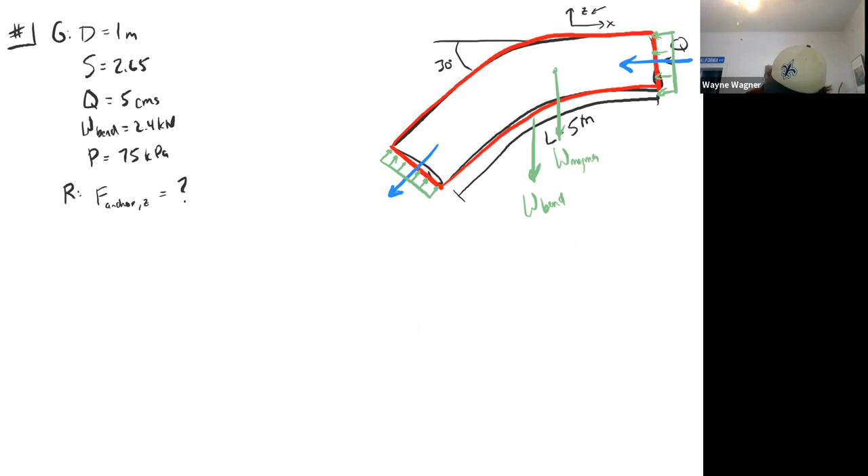So I've got the weight of the bend. I've got the weight of the magma. And then I've got the force on the pipe. So F anchor Z, and F anchor X. I'm actually going to call this FAZ because I don't feel like writing the word anchor out a million times.

Although, if ever you get into coding, somebody once pointed out to me that it was better to just write out the full word. And boy, was that correct. It's better to make it clear than to make it short.

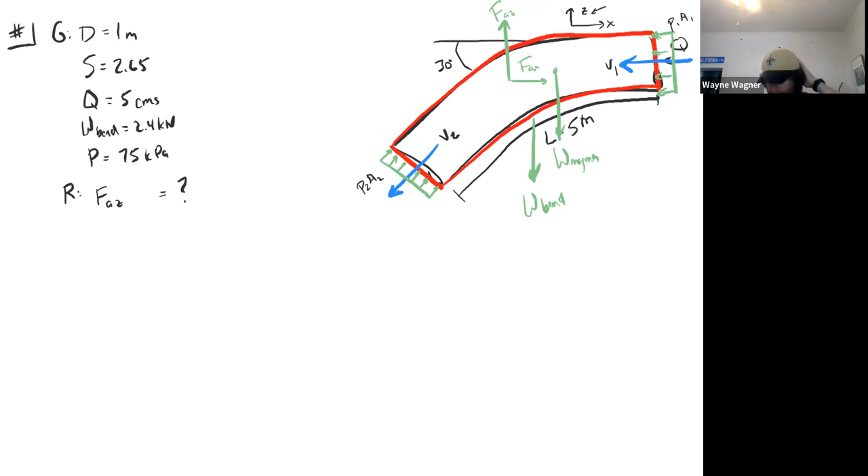So P2A2, this is P1A1. Okay, so let's go ahead and get started. And so this is in the Z direction. So our equation is going to look like this.

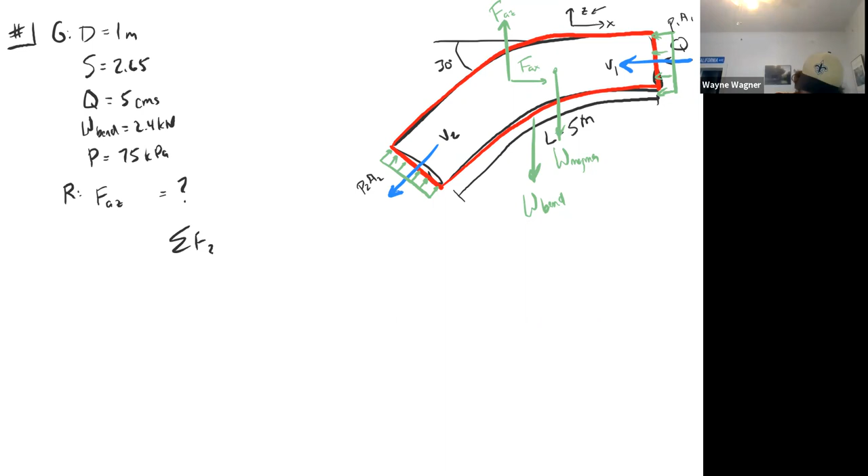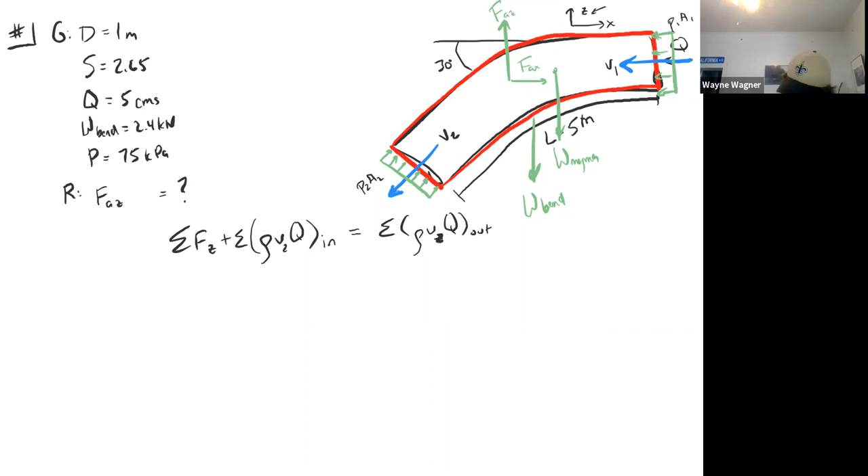Sum of the forces in the Z direction plus rho VQ in, really the sum of those, right? So in this case, there's only 1, equals the sum of rho VQ out. And the key here is to remember that, I'll just make them in green. Vectors, vector, vector. Okay, everything else is a scalar.

Okay, so let's start with the forces, and what we're going to do is just straight out of statics. Okay, so let's see, we've got FAZ, that's a vertical force. We've got minus the weight of the bend, minus the weight of the magma.

Yeah, I remember when I was making this, I was trying to think of another fluid we could use. Clearly, I don't really know that we move magma through pipes.

So let's see, vertical force 1, 2, 3. We've also got this P2A2 plus P2A2 times the sine of that angle. I'll just call it theta for now.

And then, okay, so in the X direction, I mean, we have 1 going in, but in the Z direction, we don't have 1. So we're just going to ignore that term.

So we're going to equal for the outs, I'm going to have the rho of the magma, which will be S magma. Or I guess we'll call it S sub M for magma. Okay, S magma times the rho of water.

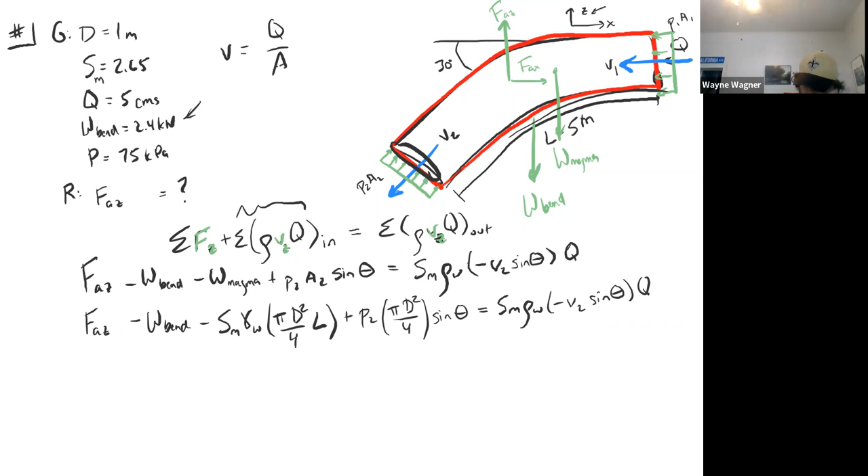Okay, so I guess the only thing we need to solve for all this is just get the velocity through that pipe. So get velocity by doing Q over A. So that's V1, V2, whatever. So V is 5 cubic meters per second divided by pi, 1 meter squared over 4. Okay, so V equals whatever that number is.

5 times 4 divided by pi. 6.3662, and that's meters per second.

Okay, so I think at this point it's just plug and chug. Let's go ahead and check that. FAZ minus the weight of the bend, 2,400 newtons minus 2.65 — by the way, 2.65 is the density of like sand. So that's how I chose it for magma. I'd assume magma is probably a little less dense than sand, but I'm not sure.

Okay, gamma of water is 9810 newtons per meter cubed. So pi times 1 meter squared over 4, length is 5 meters. The units give us newtons out of that, so that's good. Plus P2, 75,000 newtons per meter squared, times pi times 1 meter squared over 4, times the sine of 30 degrees. Sine of 30 degrees is a half.

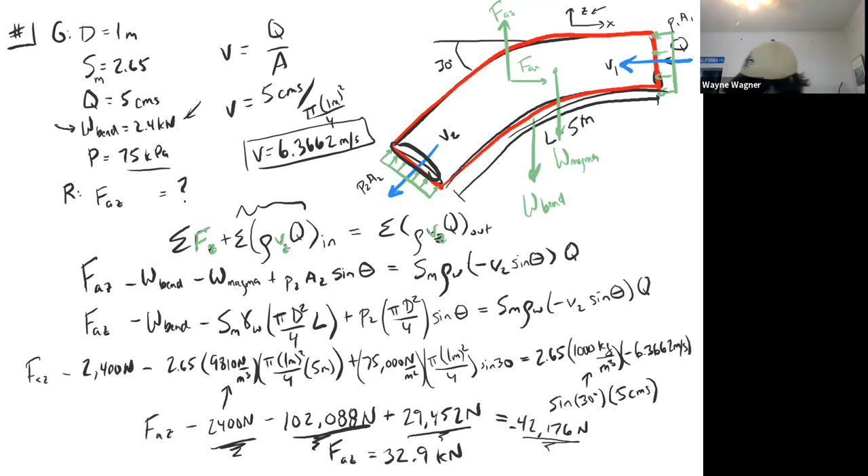Okay, so unless I did it wrong, this is 32.9 kilonewtons, and that's got a positive sign. So basically, we're going to have to push up with 32.9 kilonewtons to keep this thing from falling. Okay, so that's cool, right? So basically, the pressure is helping hold it up a little bit. The momentum is helping to propel it up a little bit. This doesn't really matter. But ultimately the weight is winning out, so we still have to support about a third of the weight. So, so that's not bad.

Anyway, I think we're out of time. So any questions? Is this logical? I don't know. At some point towards the end there, we just plug and chug. But any questions?